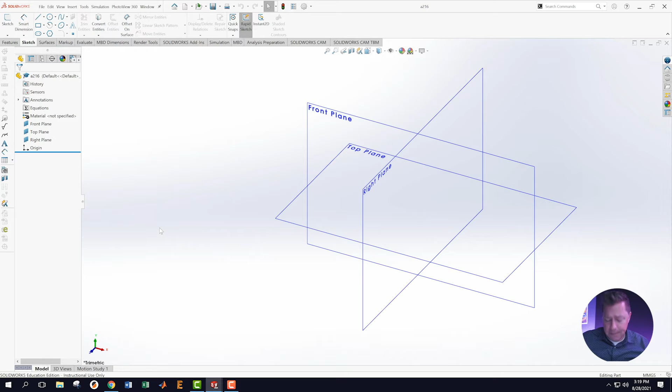All right, so now it's time for us to do activity 2.16, and we are going to learn how to trim during our sketches. This is an incredibly important thing to learn. We're going to make a new turbocharger flange with no cutouts using the trim command in this activity. Let's do it. So I've created a new part, I've called it A216, and I'm on MMGS for my units.

Let me actually just get my screen recording going here. This says sketch 4 circles of equal diameter. Make the distance between columns 112 and the distance between rows 228. Place the origin at the center. Although there are various ways to do this, I used a construction line, such as those shown at the far right. Or we could do as we did before, where we had a construction rectangle. All right, so I think what's being said here is draw a circle, draw another circle, draw another circle, draw another circle, and then line them up, line them up, line them up, line them up, and make them all 40 millimeters. That's what I think we're after right now.

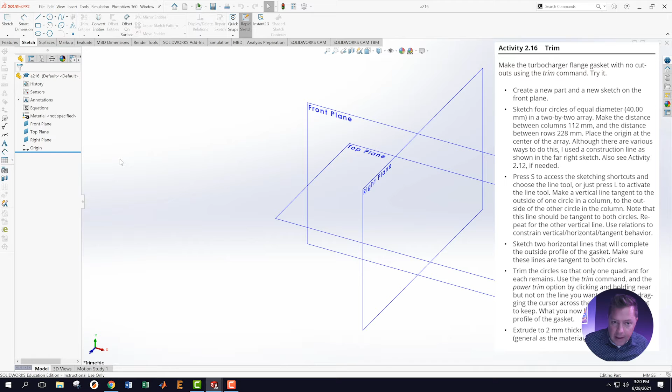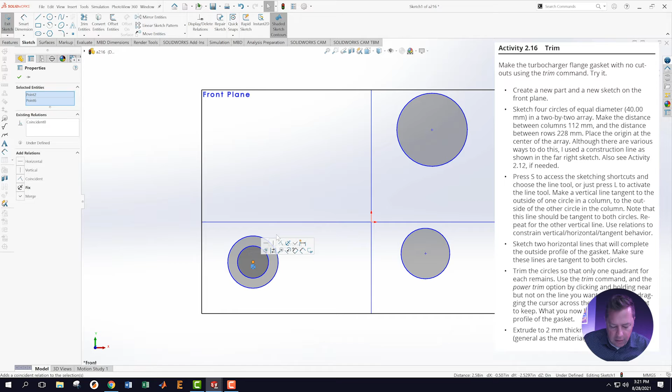So we're going to do that on our front plane. I'm going to right-click on the front plane, hit Sketch. I'm going to make 4 circles. 1, 2, 3, 4. I'm then going to grab the center of this one, hold Shift, grab the center of this one, let go and tell it to be coincident. Whoops, that's not what I wanted to do. Control Z that thing, and I want to make them vertical.

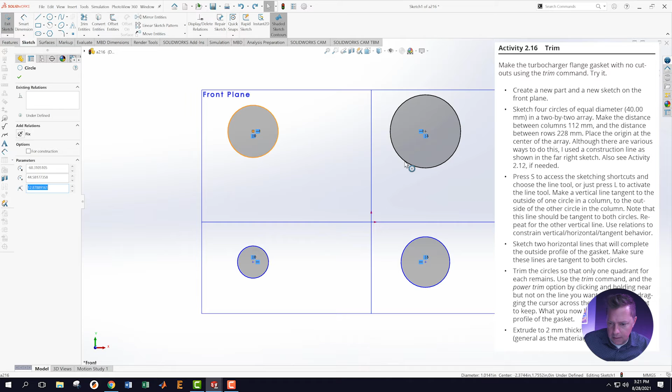I want to grab the center of this circle and the center of this circle and make it horizontal. I want to make the center of this circle and the center of this circle - remember, I'm holding Shift, clicking both, letting go of Shift, getting the little relations. Okay, then I'm going to do these ones, make them vertical. Now I want all of these diameters to be the same size. So I'm clicking the edge of all of them while holding Shift and then letting go of Shift and clicking the equal button.

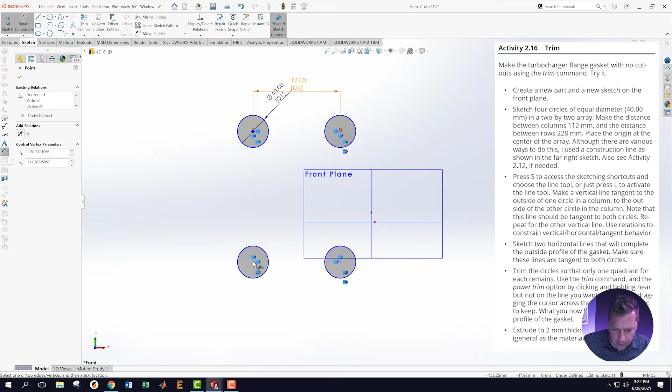Then I'm going to come over here to Smart Dimension and make these 40 millimeters. And I'm also going to make the distance between these - what did it say? 112. And the distance between these ones, 228. And I got to get the origin somehow in the center here.

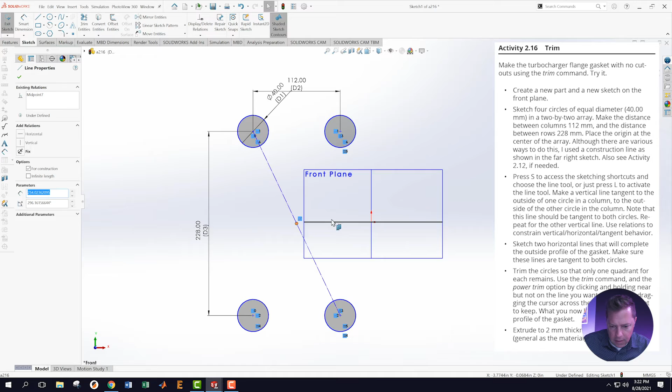So I'm going to construct a line from this center to this center. I'm going to make this a construction line. Going to find the center of this circle, the center of this line, hold Shift, click the origin, let go, tell it to be coincident. Now everything's turned black because everything is fully defined. Excellent.

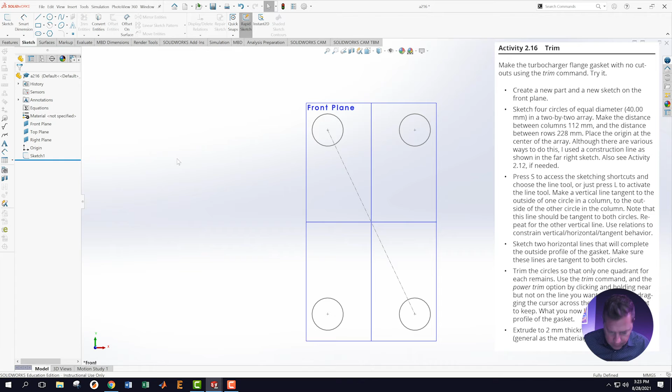Okay, it's fully defined down here at the bottom. Notice over here it still has a minus sign, but if I go on that, if I hit the check mark, then we are set. It's no longer underdefined over here. Okay, let me see if I'm still screen recording here on my iPad. I'm not. We'll go back to that if we need to.

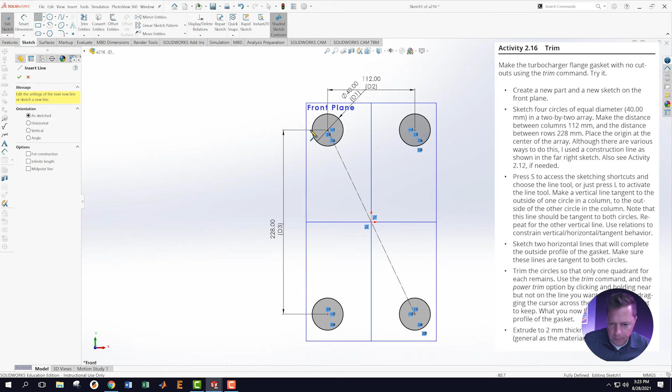All right, so now I'm going to edit this sketch because I have some more things to put on this sketch. And I'm going to learn an important feature here in the third bullet. It's telling me to press S to access the sketch operations. Great, look, I can go down here and click line. And I want to go from here down to here. I'm going to hit S again, get another line from here down to here. Great, I'm going to get another line, hitting S, going from here over to here.

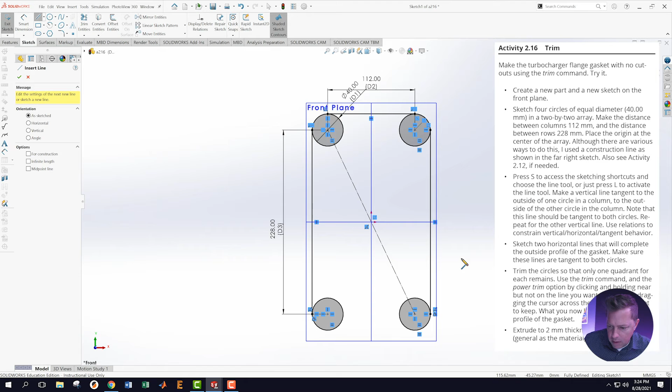Excellent. Let's get one—these are all turning black. Let's get one that's not turning black, say we're not very precise in our grabbing, and we've done this.

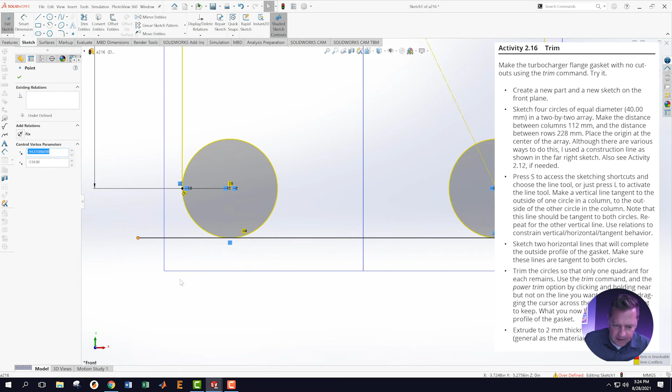Okay, this one's blue, meaning it's underdefined. What I need to do then is make sure that this line and this circle are tangent to each other, which they are, and we can see that we just created a little problem. Let's see if we can figure out what that problem is telling us.

Okay, we have all these things in conflict. Let's think for a second about why maybe they would be in conflict with each other. Why would they be in conflict? First of all, this point should be coincident with this.

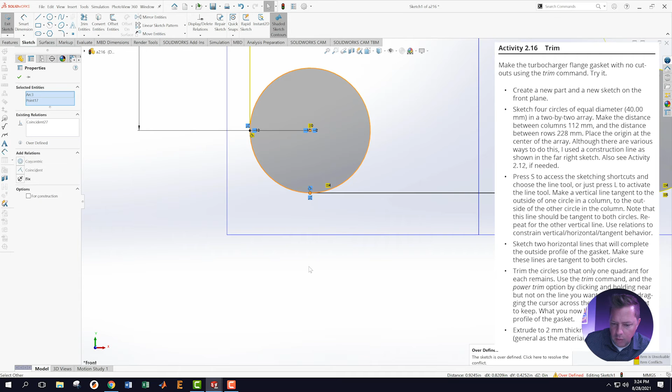So let me first tell it everything I wanted before we figure out what's overdefined. And also, I think we know that a lot of what's on here we're not going to want, because we're going to need to trim some stuff. But let's not worry about that yet. Let's read what the guidebook says.

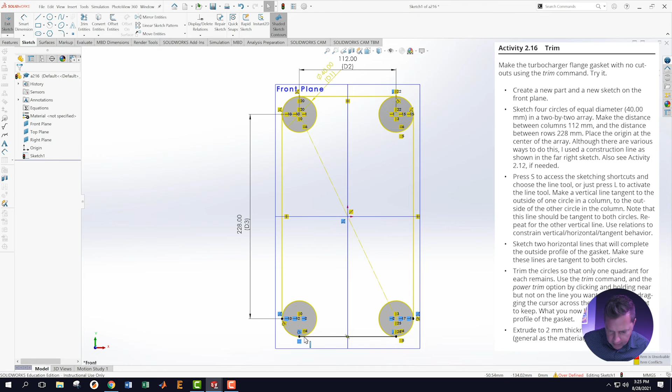Use relations to constrain vertical, horizontal, and tangent behavior. Okay, first thing is I need this to be horizontal. Great, oh look, now it's defined.

I need this one to be vertical. I need this one to be vertical. I need this one to be horizontal. I can see them on there. I need this to be tangent, and this to be tangent, and this to be tangent.

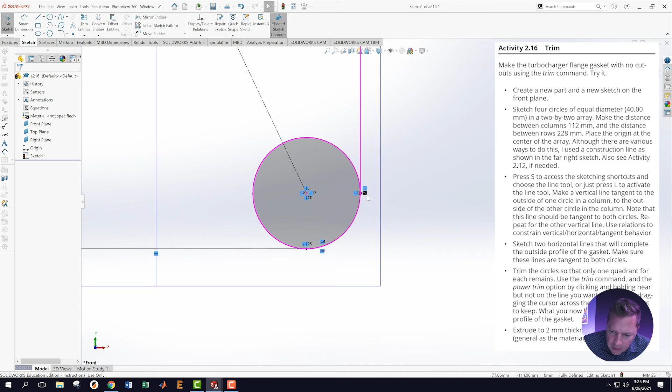And this one's not showing tangent, but I'm going to add it and see what kind of trouble it will give us—which did not give us any trouble.

Okay, over here, let's get this thing and this thing to be tangent. Great, and this one's already showing tangent.

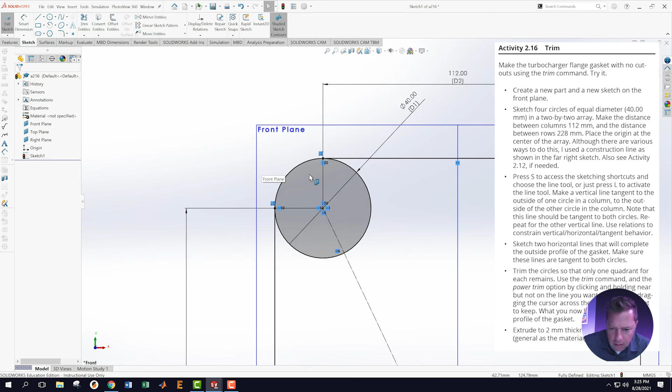This one over here is not showing tangent, so I'm going to make those tangent. And then this one over here is also not showing tangent, so let's make that tangent.

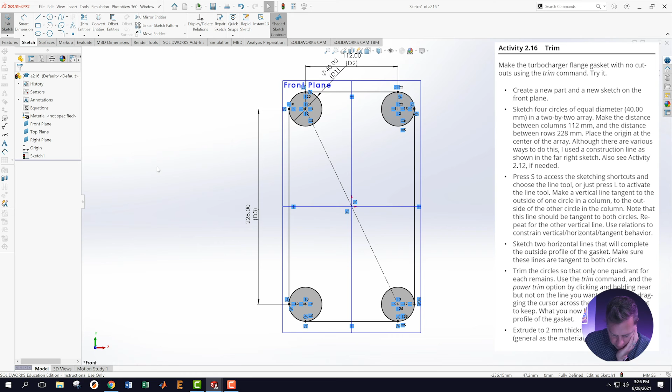So look, we've added in the relations that we wanted, and in doing so, we got rid of some of our conflicts. I think we're ready to go on to the next piece now, which says trim the circles so that only one quadrant for each remains.

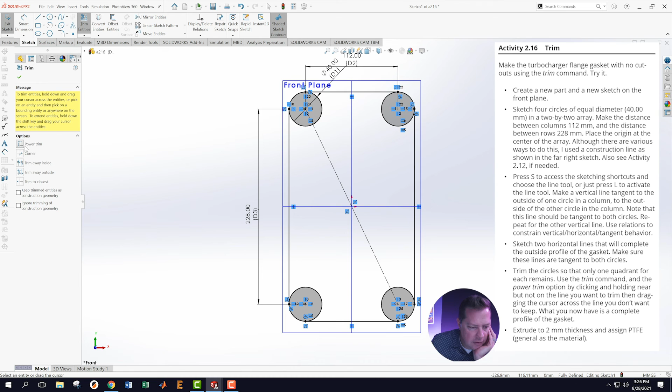Use the trim command, the power trim option, by clicking and holding near but not on the line you want to trim, then dragging the cursor across the line you don't want to keep. Okay, so we're going to go into here—it's already down on power trim right here. The way power trim works is you just go over the stuff you don't want.

Okay, I'm still on trim over here. And there we go.

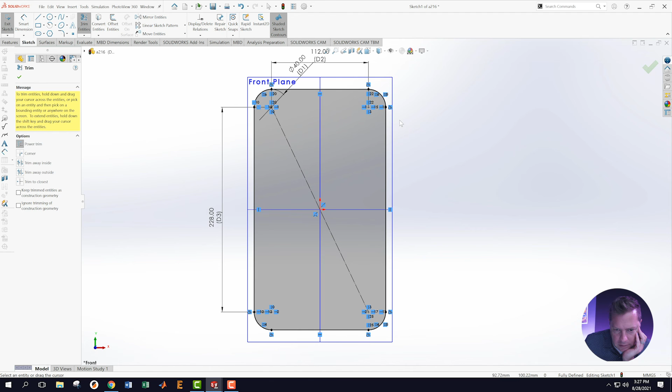What just happened here? We are fully defined. You can see this is loaded with geometric relations—horizontal, tangent, equal, vertical, vertical, horizontal, horizontal. They're just all over the place, but we have fully defined it: its shape, size, and location in space, which is what is needed.

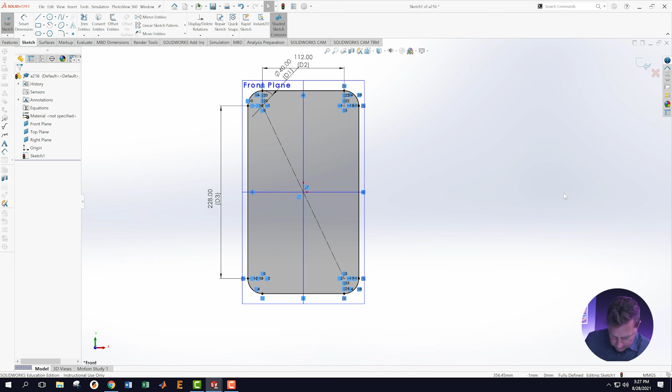So we're going to hit go on that. We are then going to go to the next step here, which says extrude it to be 2 millimeters thick and assign PTFE as the material.

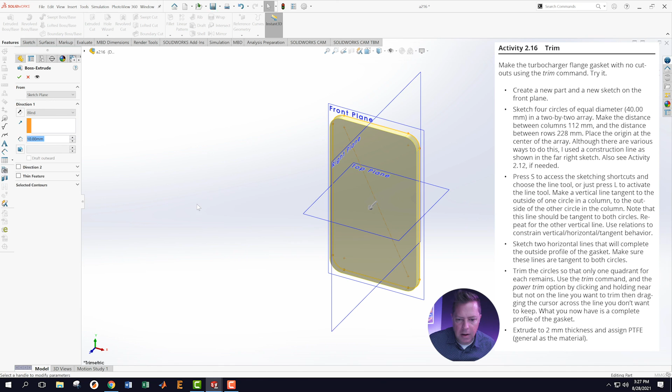So click on that, go over to features, go to extrude boss base. Instead of being 10 millimeters, I want it to be 2 millimeters. This doesn't tell me what direction to go, but I can switch it later because I know how to do that—and so do you, because we did it earlier.

Okay, now we need to assign a material, so right click on material, edit material. PTFE is already selected, not assigned, but selected because it remembers the last thing we had done while working in the system today. Close that.

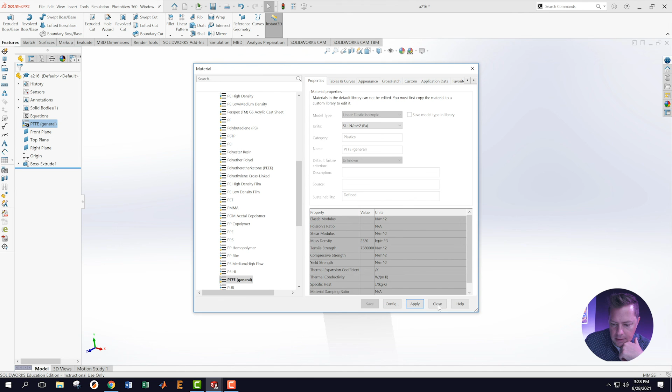PTFE is there. I can check to see if this is good by checking my mass properties, which I can do by looking at evaluate, go into mass properties, and this is 187.42. 187.42 is the correct mass. We are good—so that one worked.

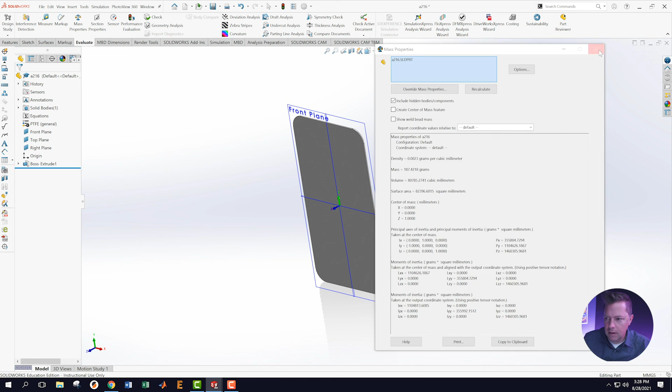Close that. File, save.